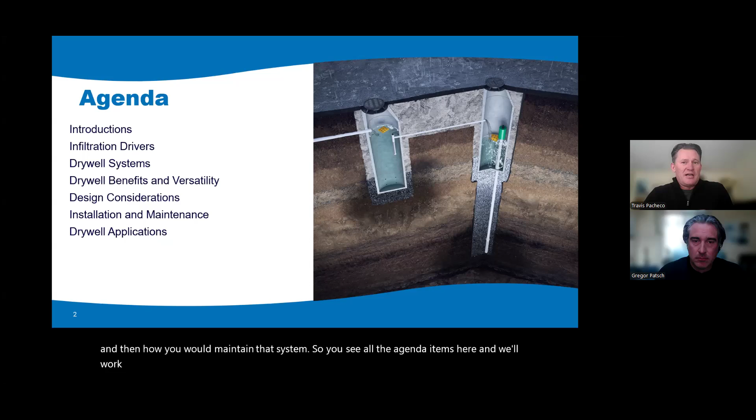Yes, Michelle, thank you. Appreciate that introduction. All right, I will start us off. Thanks for joining us today, we really appreciate it. The overarching goal here is to really describe in broad terms what a modern dry well is, what applications you might use it in, and then how you would maintain that system. You see all the agenda items here, and we'll work through those. It looks like we've got about 30 minutes, and then we'll have some good Q&A afterwards.

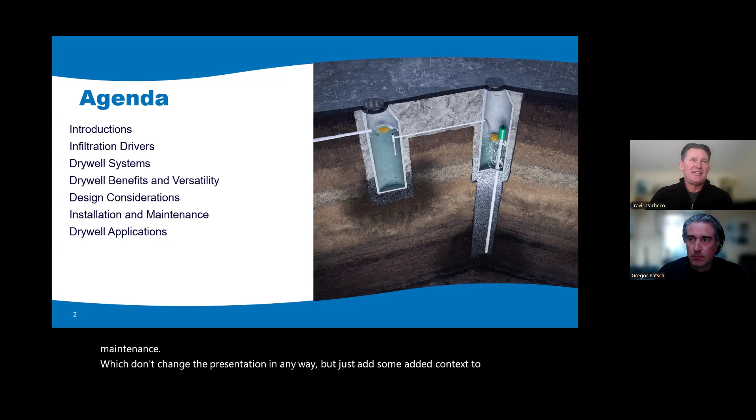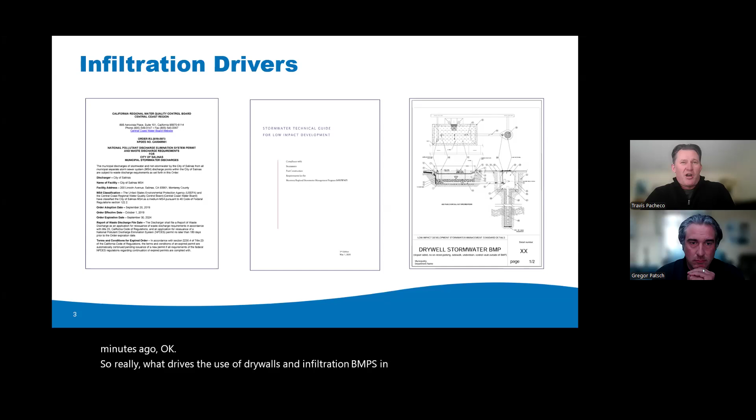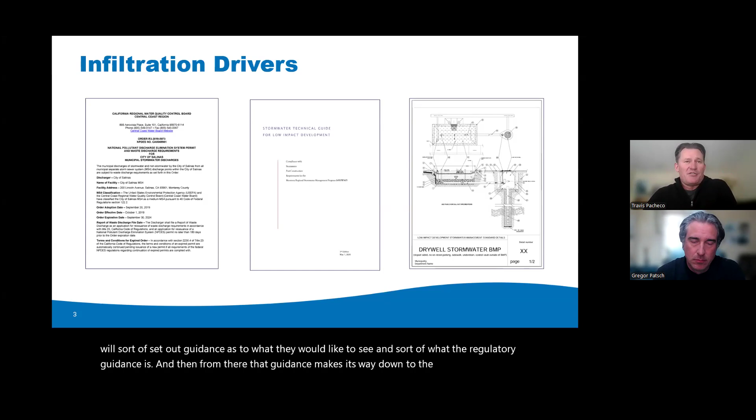So really, what drives the use of dry wells and infiltration BMPs in general? Well, typically it's the regional water board, and there's 9 regions, and the regional water board will set out guidance as to what they would like to see and sort of what the regulatory guidance is. And then from there, that guidance makes its way down to the counties or organizations like Monterey C or the local agency who then implements how they're going to achieve those goals set out by the MS4 permit.

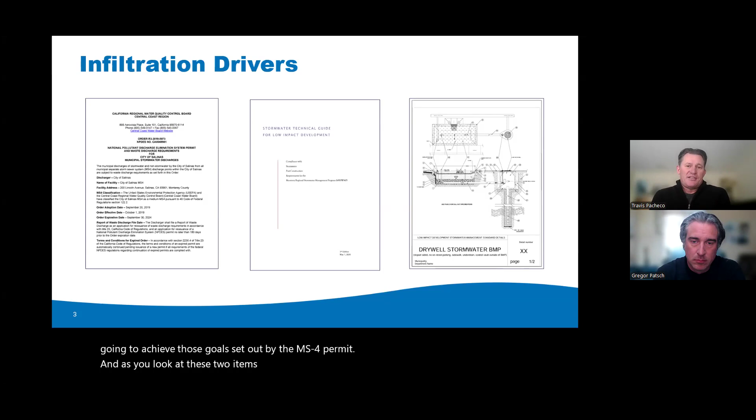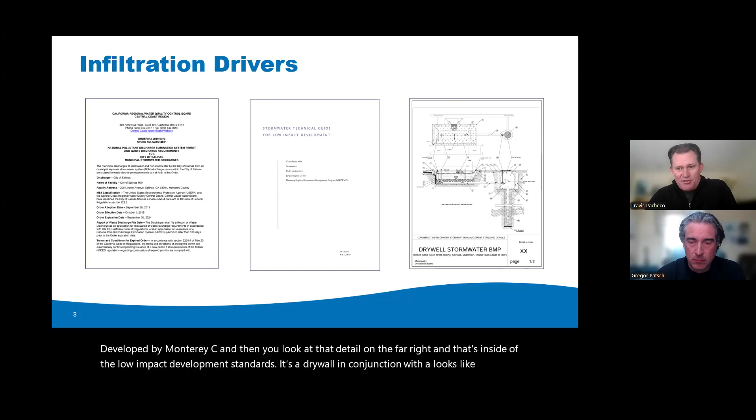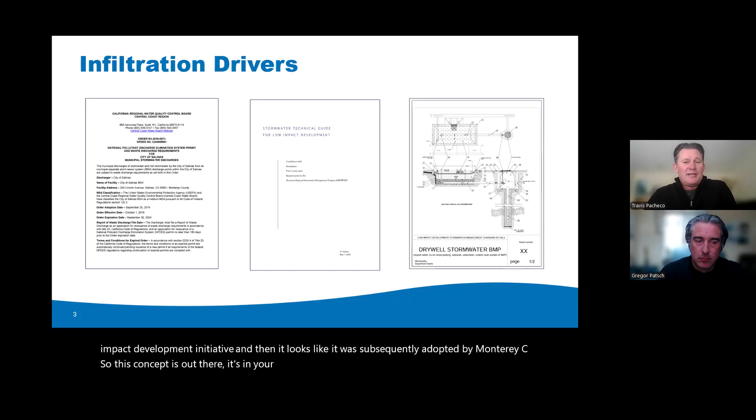As you look at these two items on the right, these are developed by Monterey C. And then you look at that detail on the far right, that's inside of the low impact development standards. It's a dry well in conjunction with what looks like a bioretention area, a bioswale type of area. So that's very common. That was developed by the Low Impact Development Initiative, and then it looks like it was subsequently adopted by Monterey C. So this concept is out there, it's in your guidance locally, and so what we're describing today is very much in line with what the guidance says or recommends.

When you think about dry wells, the first thing you hear is the term 'well.' So what we want to point out is that when we're talking about a stormwater infiltration BMP or dry well, it's very different from a well that interacts with the groundwater, such as an ASR well or something similar.

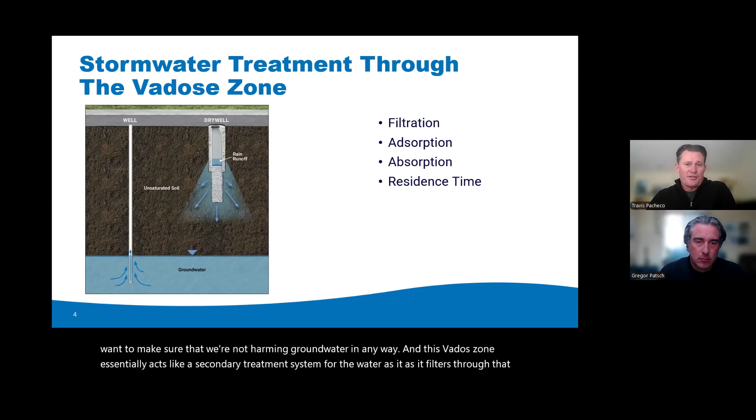So if you look at a set of plans, you'll see the term dry well all over, and oftentimes they're referring to this little area under a drinking fountain or something very generic. But when you look at a manufactured, or modern dry well, it looks very different.

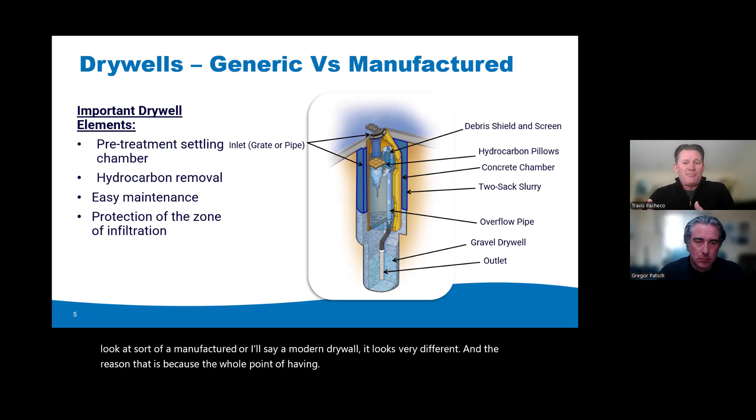The reason for that is the whole point of having this infiltration BMP is that it lasts 20 to 25 years. So in order to do that, you want to make sure it's maintainable, so that over the long term you're going to have that rock column you see at the bottom of that schematic actually continuing to infiltrate water.

So as we look at a modern dry well, we've got a pre-treatment settling chamber. That could be, in general, around 12 to 15 feet, something like that. And that's acting as trash capture and sediment settling. You'll see a hydrocarbon pillow in there, that's really for that sheen that comes off of a parking lot.

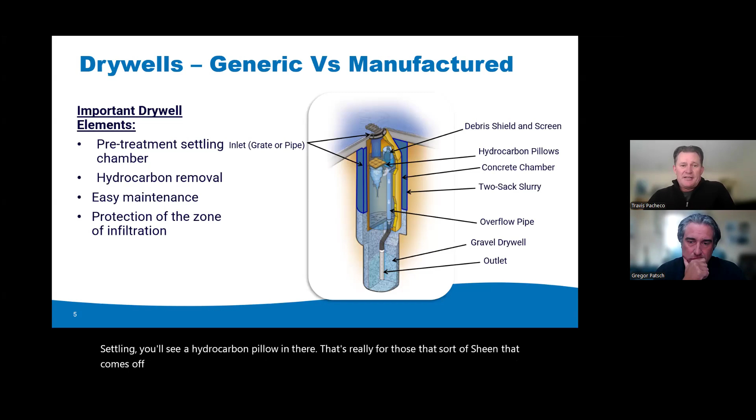And then you want it to be maintainable. Greg will talk about this as we continue, but really that's a Vactor truck maintenance - it's very easy to maintain over time. And then many years down the road, you've still got a functioning dry well because you've protected this rock column when it was installed.

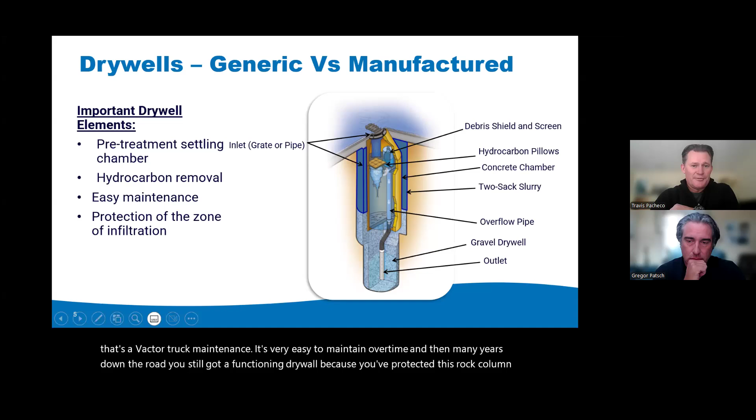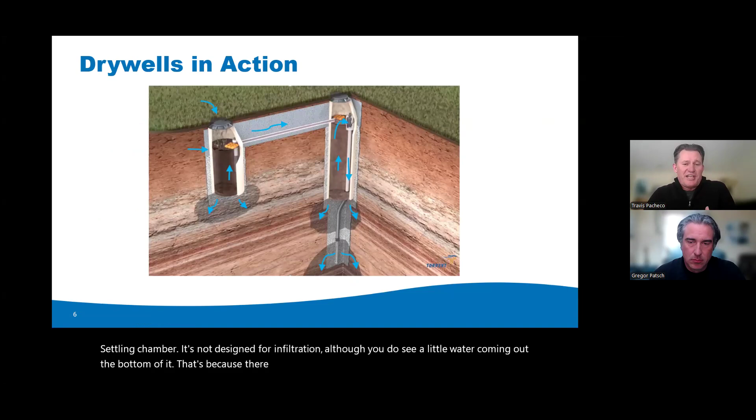So a typical dry well looks something like this. That chamber you see on the left, that's an additional settling chamber. It's not designed for infiltration, although you do see a little water coming out the bottom of it. That's because there are weep holes in these manhole chambers that allow the chamber to draw down after a storm event. But that primary chamber, or the chamber on the left, could represent any number of things.

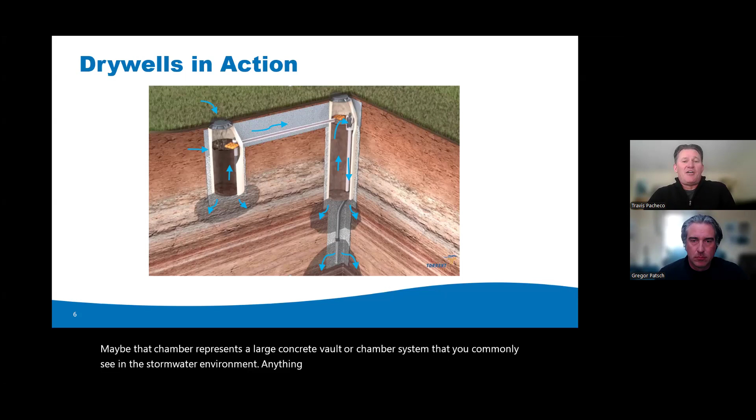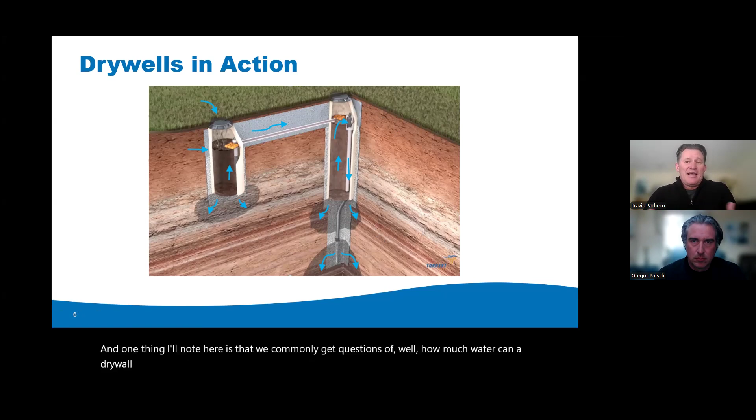One thing I'll note here is that we commonly get questions of, well, how much water can a dry well infiltrate? And the real answer to that is, what can the soils take, right? So the whole purpose of using a dry well is to provide a conduit from the surface to some beneficial soil where we can actually do some good infiltrating. Oftentimes around Northern California, you've got clay layers in this first 0 to 20 feet. Well, we want to be able to penetrate through that so we can actually do some good infiltration.

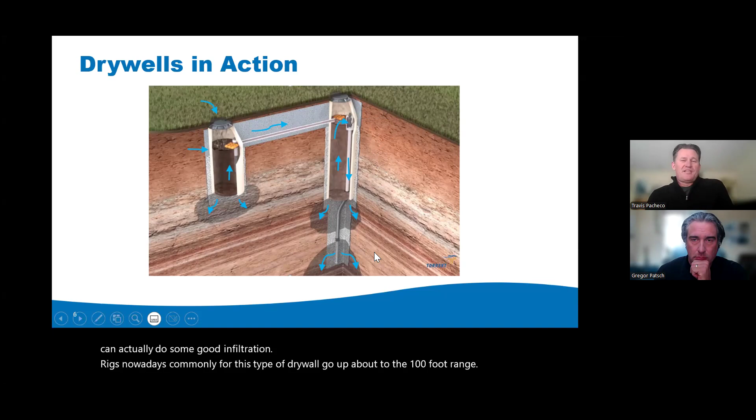Rigs nowadays, commonly for this type of dry well, go up to about the 100-foot range. More common, we see somewhere around the 50-foot range. That seems to be an average depth of dry well that we'll see when we install these things.

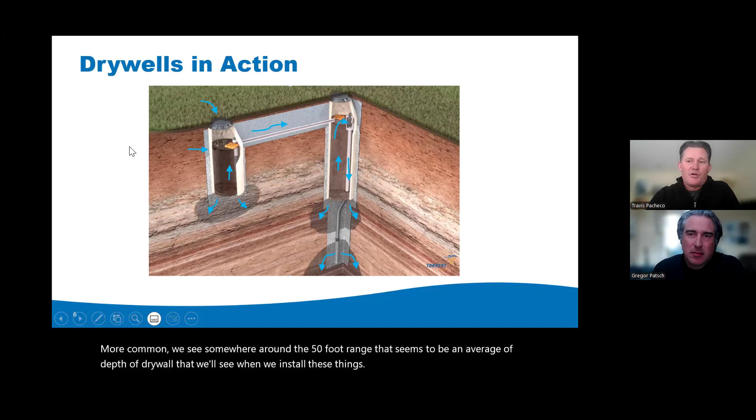As you mentioned before, there's separation between the bottom of the dry well and groundwater, and oftentimes it appears easy to assume that the dry well is bypassing more of that vadose zone to get us closer to groundwater.

But the reality is it's kind of relative to how deep that groundwater is. So when we're looking at concerns of contamination risk, things like that, people often falsely assume that dry well is connecting directly to groundwater, but it's that separation that matters.

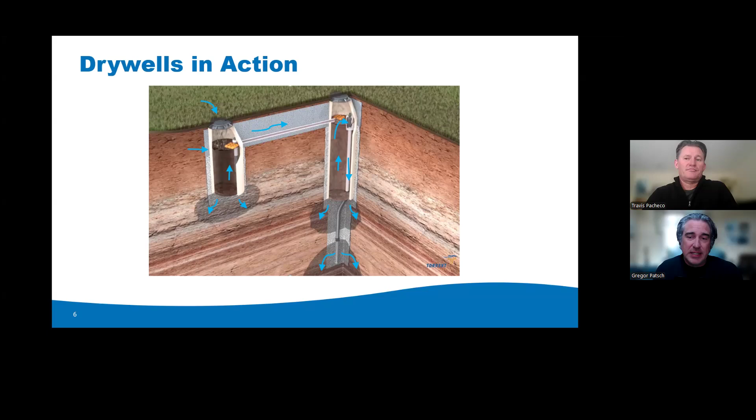So one thing we like to talk about is a dry well - you could have a 100-foot deep dry well, but groundwater could be 200 feet below that. So the separation between the bottom of the dry well and the groundwater is 100 feet. You may also have a 15-foot deep infiltration basin, but the groundwater might be 30 feet below the ground, so there's only 15 feet of separation. So even though we're sometimes going up to 100 feet deep with these drywell systems, it's all about relative depth to where the groundwater is.

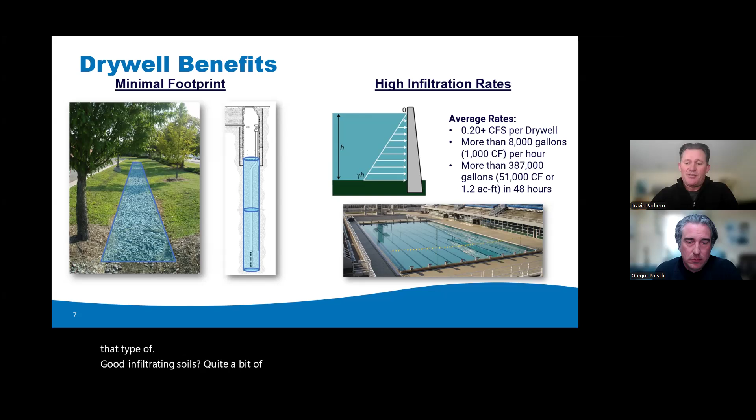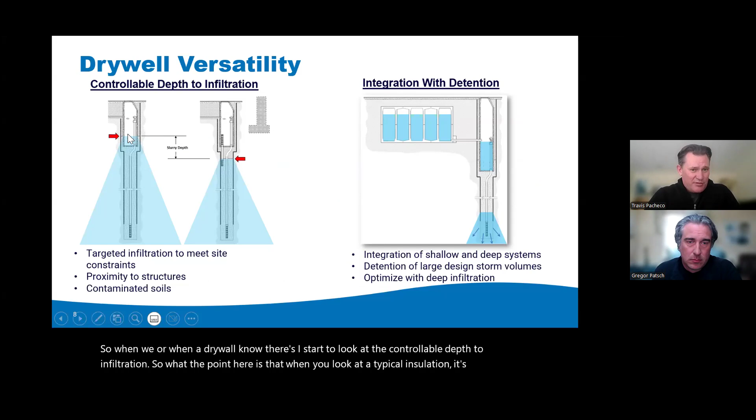So when it comes to a dry well, I start to look at the controllable depth to infiltration. The point here is that in a typical installation, there's oftentimes a slurry depth to about 3 to 4 feet from the top to the bottom of the manhole. That depth can be controlled.

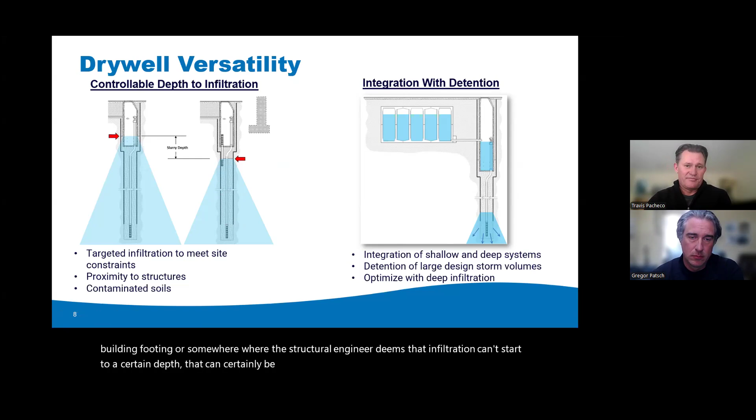For instance, there was a dry well installed on a cliffside, and the slurry depth went to 50 feet so that the side of that cliff wasn't washed out. Also, if dry wells are installed near a building footing or somewhere the structural engineer deems infiltration can't start to a certain depth, that can be controlled with the use of a two-sack slurry, as you see here.

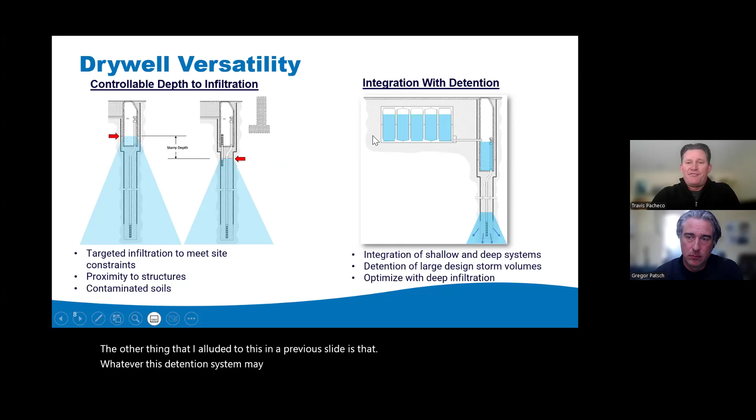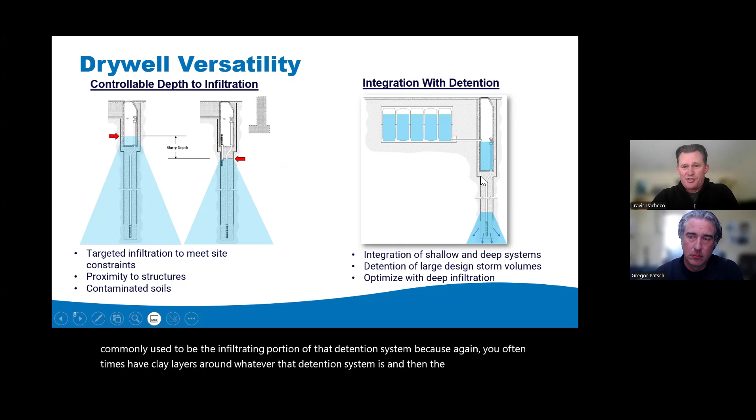Whatever this detention system may be—a large concrete vault, chamber systems—it's very commonly used as the infiltrating portion of that detention system, because you oftentimes have clay layers around whatever that detention system is, and then the dry well can act to empty it in the allotted time, which is oftentimes 48 or 72 hours, depending on local guidance.

When it comes to a modern dry well installation, typically the rigs will arrive and mobilize after rough grading, and then it takes maybe 2 to 3 days to drill and install, depending on the depths, the slurry, and other factors.

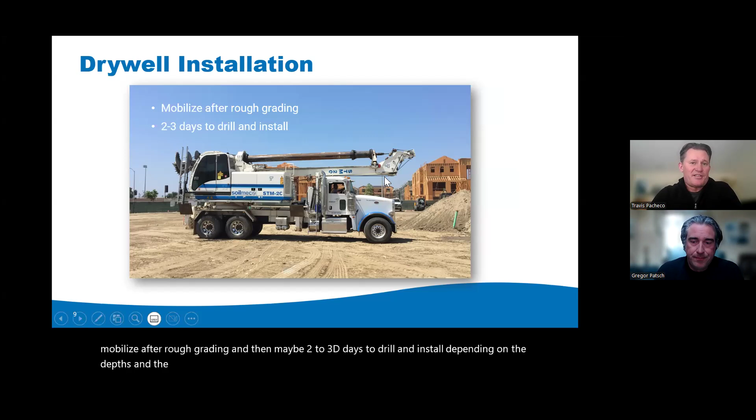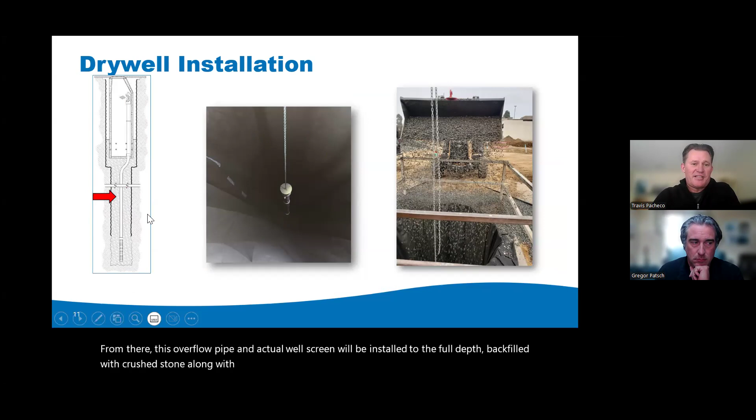The first thing that happens is an auger rig will drill down to the full depth—maybe this represents 50 feet. From there, an overflow pipe and actual well screen will be installed to the full depth, backfilled with crushed stone along with a geotextile fabric, which keeps the fines from migrating into this rock column.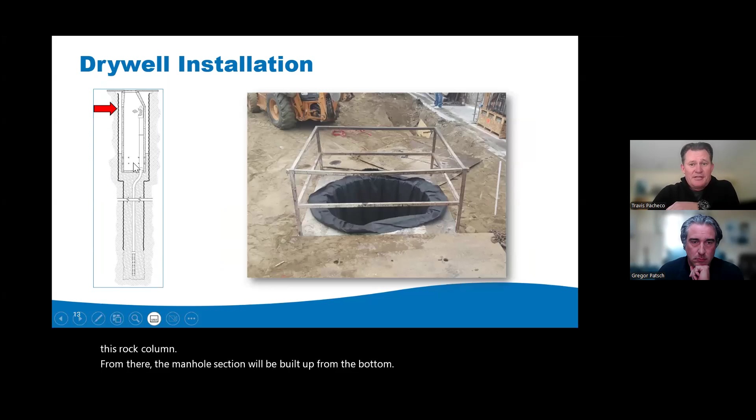From there, the manhole section will be built up from the bottom all the way up to grade with a cone section, and then we'll do the finished slurry and make the connection. Depending on whether the dry well is a 1-chamber or 2-chamber system, all of that is done by the drilling contractor, and a finished installation is turned over to the city, the agency, or the contractor in general.

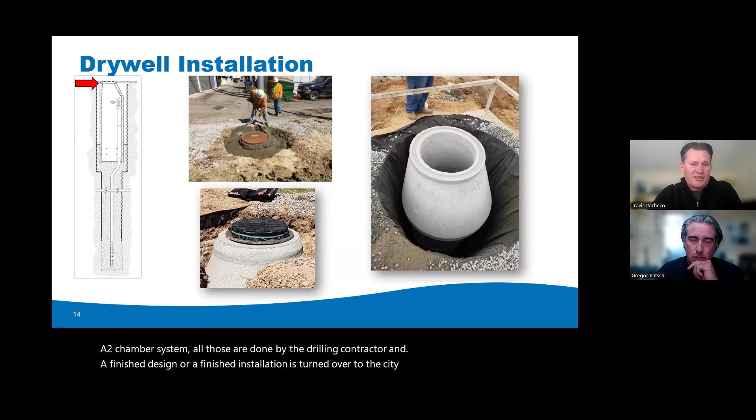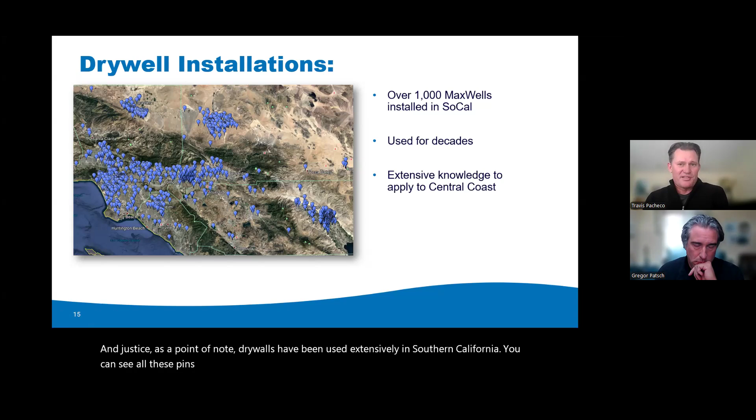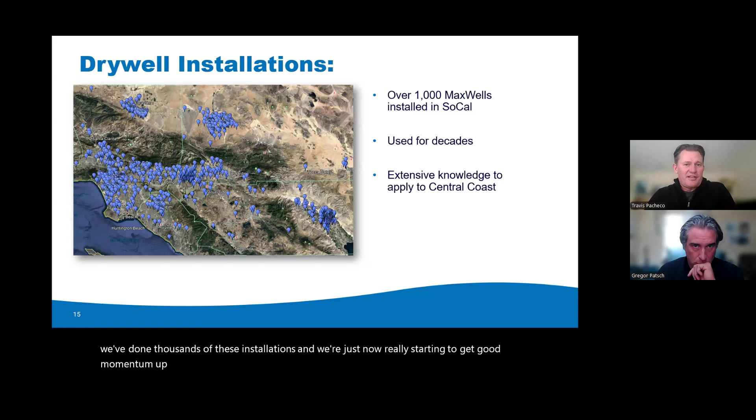As a point of note, dry wells have been used extensively in Southern California—you can see all these pins here, each one representing a project, often with multiple dry wells. Around Southern California we've done thousands of these installations, and we're just now starting to get good momentum up here in Northern California. I think the regulatory guidelines are starting to show that dry wells are a viable tool in stormwater applications, so their use as a concept has started to increase a lot up here.

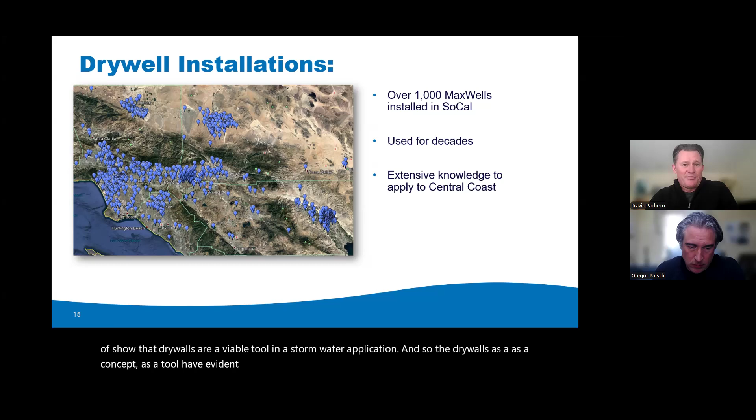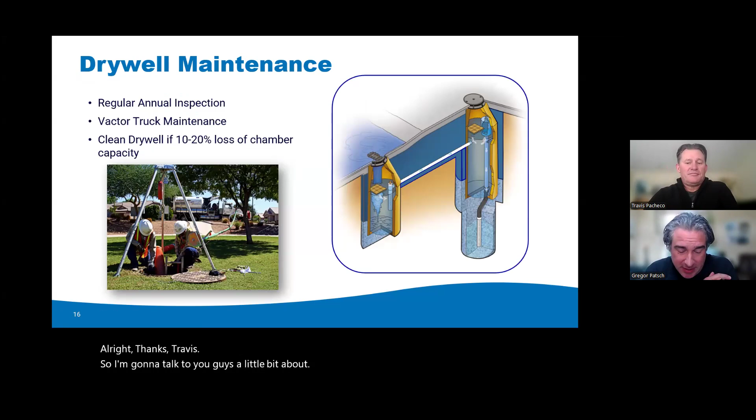I'm going to talk to you guys a little bit about maintenance, specifically maintenance of the dry well systems. There's a saying I really like that applies to stormwater BMPs: if it doesn't need maintenance, then it's not working. We're trying to filter out pollutants from the environment, and all BMPs are going to need maintenance, so it's just a routine part of the stormwater BMPs.

One of the challenges with a dry well is, as Travis mentioned, the dry well itself is actually the gravel shaft that provides this void space for water to sit under the ground and infiltrate into the native soils. What we don't want to happen is for sediment, trash, cigarette butts, debris, any of that stuff to get into that gravel void space, because if that happens, we'll start to lose performance and capacity of the dry well.

Generic dry wells often rely on some sort of upstream pretreatment, or they don't have any pretreatment at all. These more state-of-the-art dry wells, these enhanced dry wells, integrate the pretreatment in that same footprint on top of the actual dry well. That's what you see here shown in yellow as these settling chambers, designed to capture all the trash, debris, sediment, anything you want to filter out through screens, sumps, floating hydrocarbon pillows.

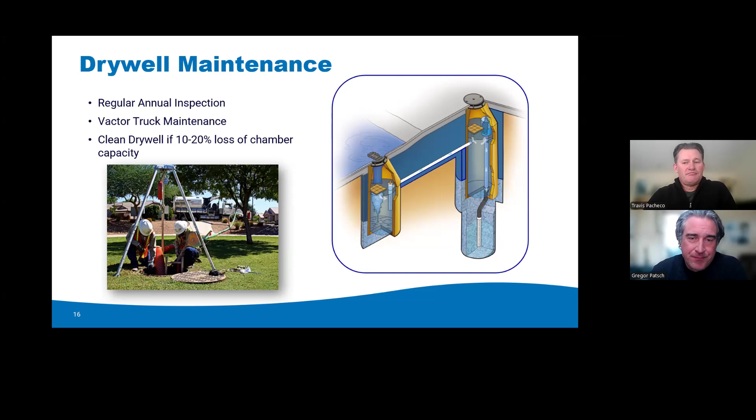Now let's go to the next slide. In terms of maintenance intervals, that's going to obviously depend on the drainage area, how much pollutants are going into these systems. Typically, especially in a right-of-way situation, you're going to have these spread out, distributed across the drainage area. You're not going to be sending hundreds of acres worth of water to these dry wells, you're typically sending just a few acres of water to each dry well.

So urban right-of-ways, parcels that have a lot of trash or a lot of sediment, or if you have some larger drainage areas, you're going to probably need to inspect and maintain these every year, maybe every 2 years, depending on that drainage area. If you have other upstream BMPs, other pretreatment systems, detention systems, trash capture devices, etc., those are going to probably take the brunt of the maintenance, leaving more of the fine sediment to be maintained at the dry well chamber. In that situation, you may be looking at 3 to 5 years in terms of maintenance interval.

Dry wells can sometimes and oftentimes be draining exclusively rooftops, especially in densely urban areas. All the roof drains will go to a dry well. In that case, your maintenance interval may be even lower because hopefully there's not too much trash or debris getting in from the roof.

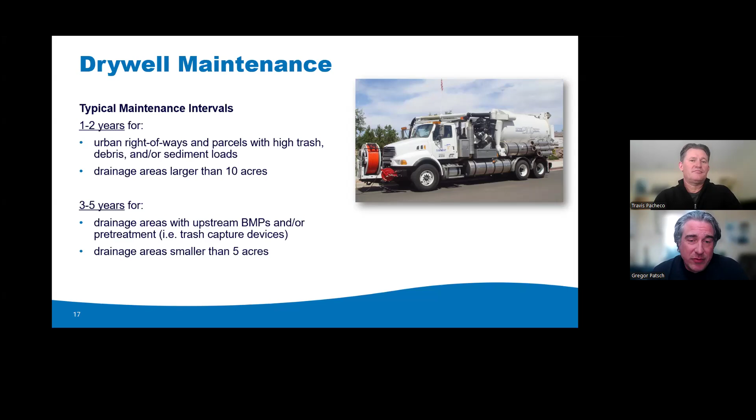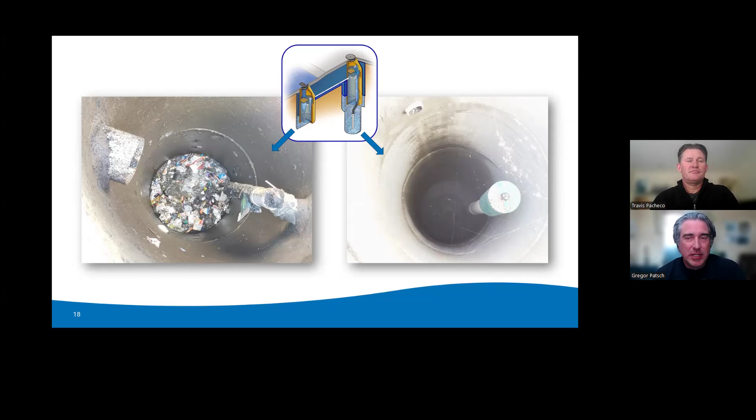It would clog the pipe that sends water over to the other chamber, and water would start bypassing this unit. That's a problem because it's not working, but it's good in that once you do maintain it, the system will continue to perform as designed because we haven't allowed any of that debris and sediment to get into the gravel. It's designed to fail at this point so that we can go in and do maintenance and have it fully restored.

Also want to talk about Green Street applications and some applications of drywells. A lot of drywells are implemented as part of private development to offset stormwater as part of low impact development compliance. So any new development or redevelopment, engineers will sometimes look at drywells as a BMP type to deal with stormwater management. On the public sector, we're seeing more and more drywells being implemented.

The cities own and operate these right-of-ways. They don't have a lot of space to do things - they've got utilities underground, all kinds of different easements, etc. So space is limited. And as MS4 permit holders, you're dealing with trying to meet your own stormwater regulations, TMDLs, and manage your urban runoff. Then finally, in California we're always sensitive to groundwater recharge and droughts, especially down here in the southern part of the state.

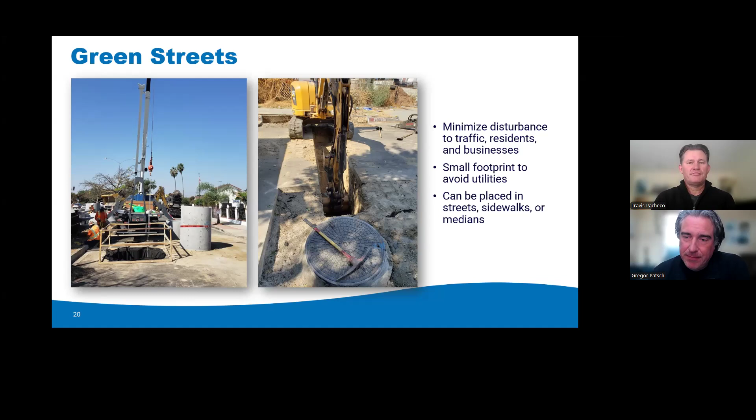Just to show a couple configurations of how these might go in a right of way: you can have an existing high flow catch basin designed to capture your 10, 25-year storm. You can put a new catch basin upstream of it to capture that first flush of stormwater and allow it to infiltrate. If it gets overwhelmed, the water can continue on down to that larger high flow catch basin.

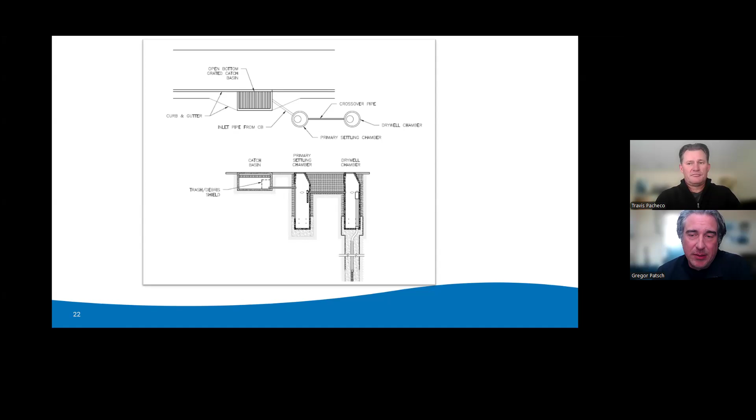One of the other advantages is you can put the dry well wherever you need to in the plan view where it makes sense. You could have a 5-foot pipe connecting from a catch basin, or a 100-foot pipe. That lets you set the catch basin at the low point where you want to collect the water, and gives you a lot of flexibility on where you actually put the dry well, depending on underground utilities.

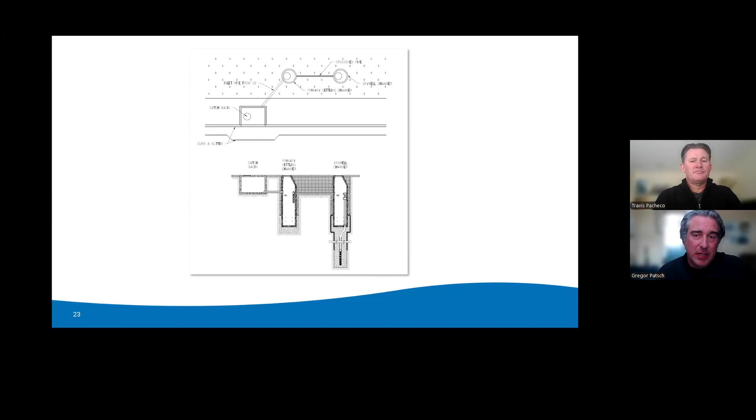However, this project, for whatever reason, was not draining as designed, and the water would just sit there for many days, long past the drawdown period. So some dry wells were put in to bypass what was likely compacted soil under the basin and allow the water to drain so the park could be used as intended.

We're also seeing this same application used on existing basins that are working just fine, but due to new development and additional water coming to it, they want to upsize the basin. So in lieu of regrading the basin to make it larger, which often means deeper, dry wells can be used to increase the infiltration capacity without any massive grading. That's becoming an interesting new application for dry wells.

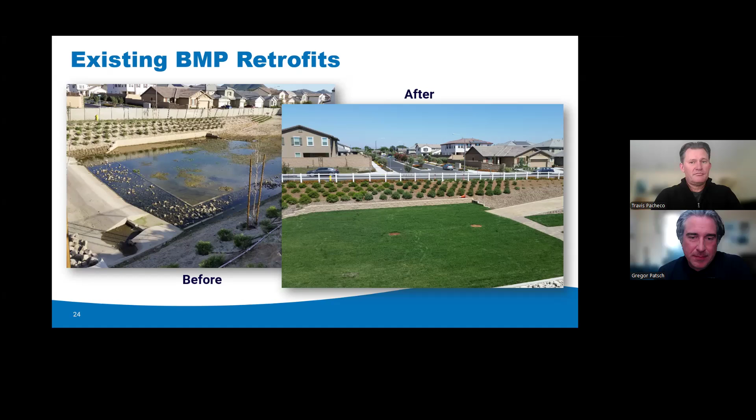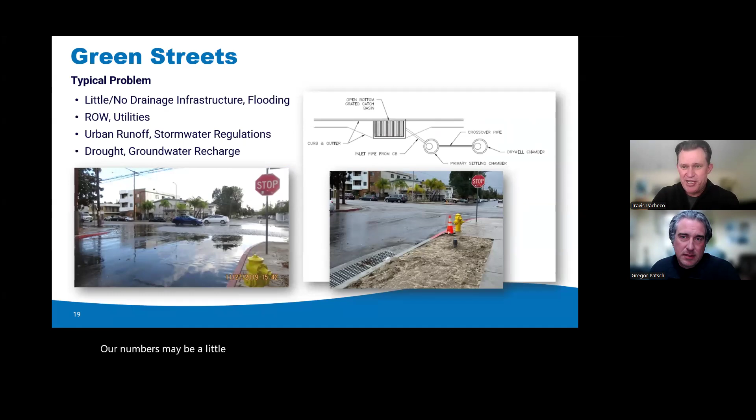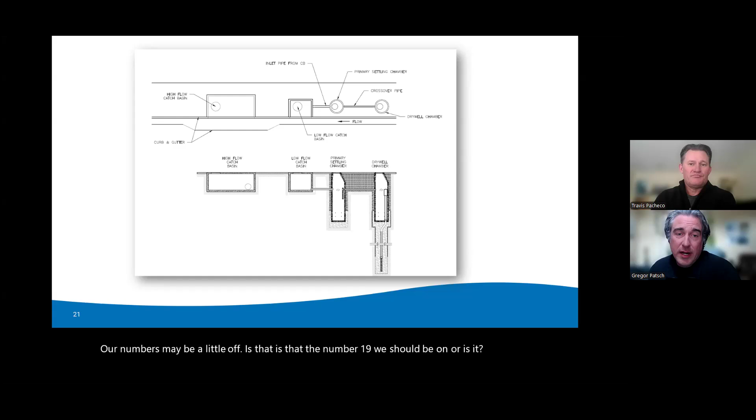Can you please explain the purpose of the high flow catch basin, and does it connect to the drywell system? Yeah, so this is a scenario where there's an existing storm drain, a high flow storm catch basin, probably designed for a 10 or 25-year flood to deal with water running off the street. That's going to continue to be in place, continuing as a bypass for the dry well. But you could put in a new catch basin upstream of that.

So flows coming in from the right-hand side will allow that water to go into the dry wells. But during the peak of a storm, the dry wells are typically designed for somewhere from 0.1 to 1 CFS performance, depending on the soil below. So obviously in a large storm event, you're going to exceed that, even the 1 CFS, in a lot of roadways. That water can still bypass and leave the site and keep the road dry. It's independent—it's just shown as a potential configuration where the dry well is put upstream of an existing drainage system.

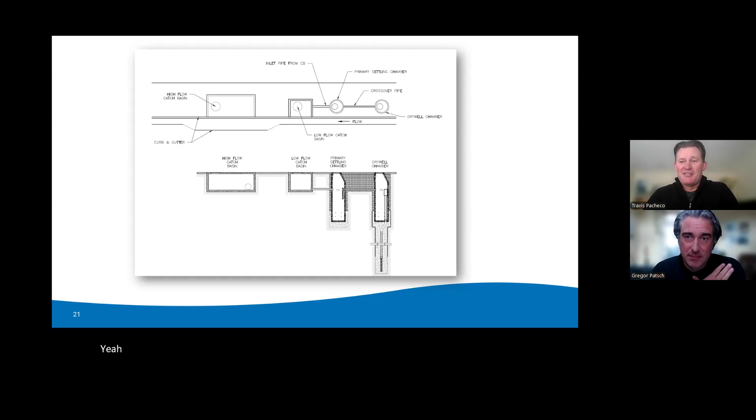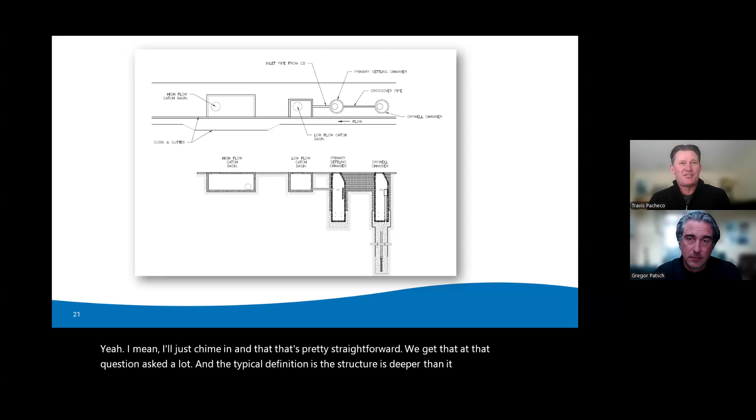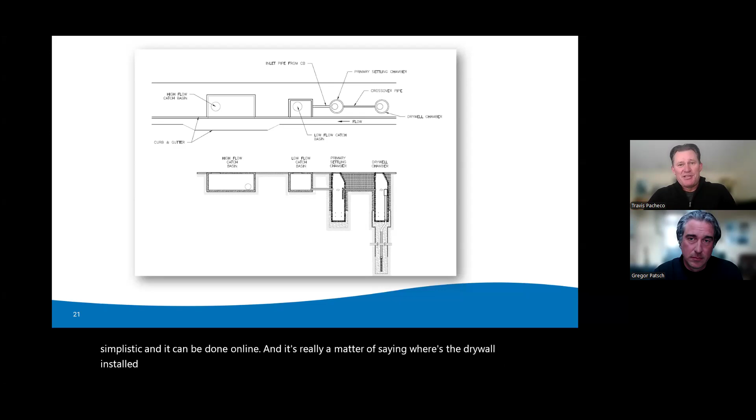That's pretty straightforward. We get that question asked a lot, and the typical definition is the structure is deeper than it is wide, and that's true. We classify by definition as a Class 5 injection well. The EPA registration is very simplistic and can be done online, and it's really a matter of saying where the dry well is installed, who installed it, how deep it is, and who owns it. So it's very easy to do. Oftentimes we'll do it for the client because it's a pretty basic application. It's really just to track, I think, if there were to be subsequent problems, but it's pretty basic.

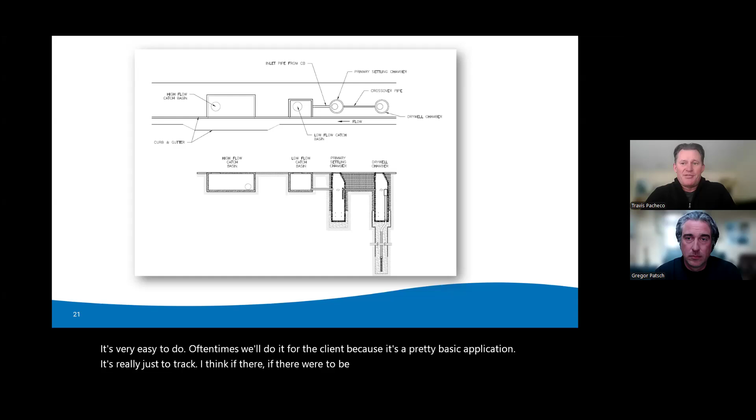The important thing there is that it's a registration, not a permit. So the EPA is not approving or denying the application of the dry well. They want inventory and record of it. There's a lot of talk in the industry that these really shouldn't be considered injection wells per the conversation we've had. An injection well is something very different—a direct injection well, I should say—that puts water directly into the groundwater, but that's treated water, not stormwater.

But for now, we do always recommend that you register these with the EPA. As Travis said, it's a straightforward form. They're not going to deny it. Dry wells are technically regulated like any other BMP under the MS4 permit system through a grading plan or an LID stormwater plan.

The next one: separation guidelines for perched groundwater. That's a good question. If they know it's perched and we can get below it to the groundwater table, you could either slurry the well at the top part to bypass that perched layer, or you could go through it. But typically when we're hitting that material, we don't necessarily know it's perched, and we're just going to assume that's groundwater, and it might not be the best location for a dry well.

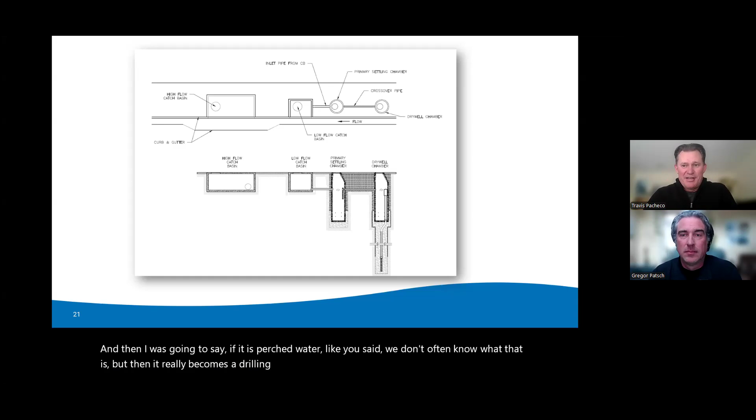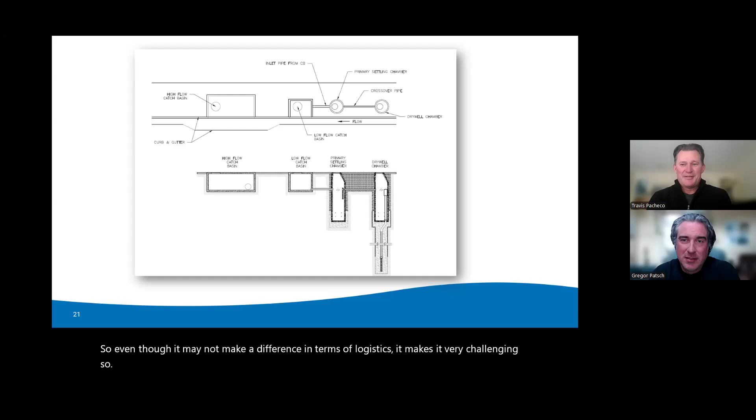If it is perched water, like you said, we don't often know what that is, but then it really becomes a drilling operations challenge. Even if we know it's perched water, now it's an operations challenge in terms of drilling because water is pouring into the hole. So even though it may not make a difference in terms of logistics, it makes it very challenging. So we might consider it just groundwater during the design and suggest a different BMP.

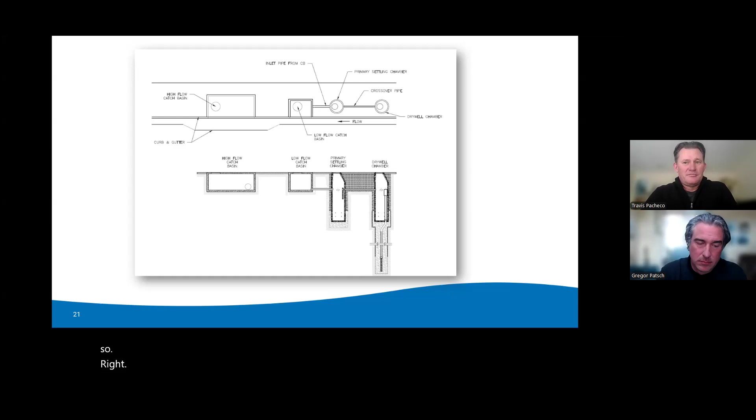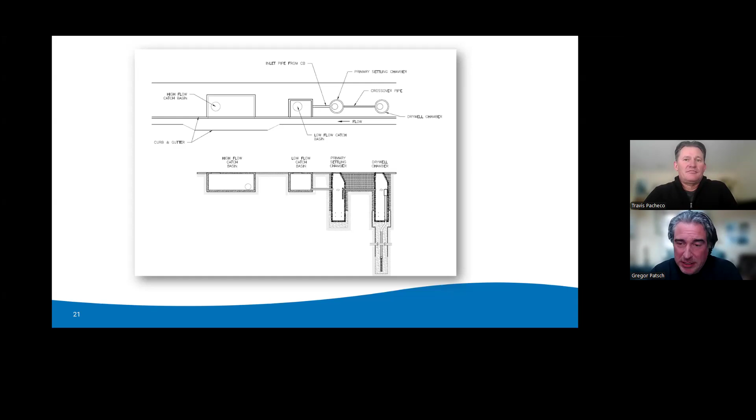Okay, last one I've got: do you have an approximate cost to install a 50-foot deep dry well? About $75,000 is a very ballpark number. That's going to include all materials, all installation, the drilling, the building of the dry well, and it wouldn't include any storm drain system coming to it. But just for planning purposes, about $75,000 per dry well.

For those who are interested in planning purposes, we'll also say about $1,000 per year per dry well for maintenance. That's just kind of a ballpark number, but it's a good number to keep in mind—dry wells may not need maintenance every year, so that's an annualized cost, but that's a good planning level number for dry wells.